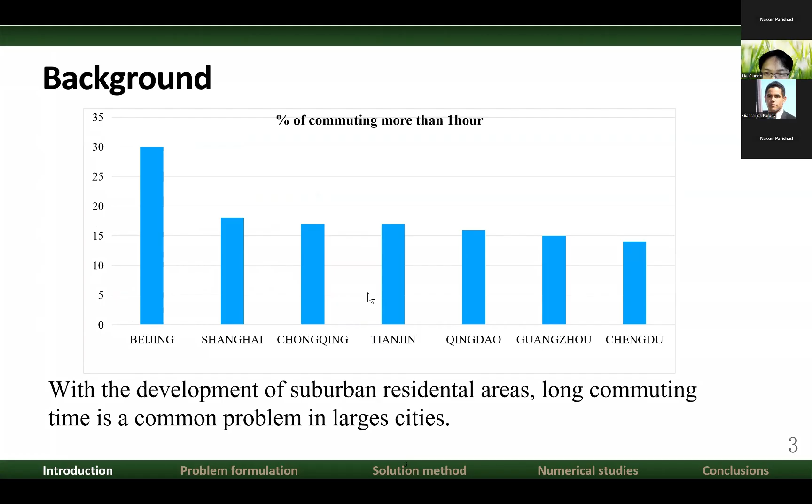Express bus service, or limited stop bus service, is a potential solution to the problem. As express buses skip a series of bus stops and may use a faster path, travel time can be significantly reduced. Moreover, due to shorter circulation time, the express bus can provide higher frequency with a limited fleet size. So with proper design, express service can bring a lot of benefits.

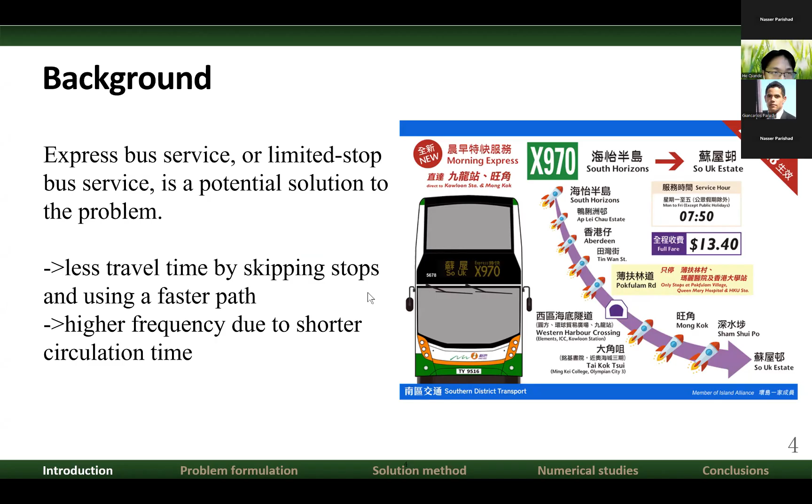We reviewed the literature related to express bus service design, and you can see the scale of their research is usually small, such as a single road or bus corridor. Only one paper expands the model to a network scale. Moreover, all of these studies only consider predefined regular routes. Currently, there is no literature considering regular route design and express service design at the same stage. Besides, we also consider deadheading as a strategy to avoid overload.

The main contributions of this study are as follows. First, we propose a model to simultaneously consider transit route design, express service design, and frequency setting problems, while considering capacity and the deadhead strategy. Second, we developed a modified genetic algorithm to solve the model. Third, we examined the properties of the problem and the performance of the GA algorithm.

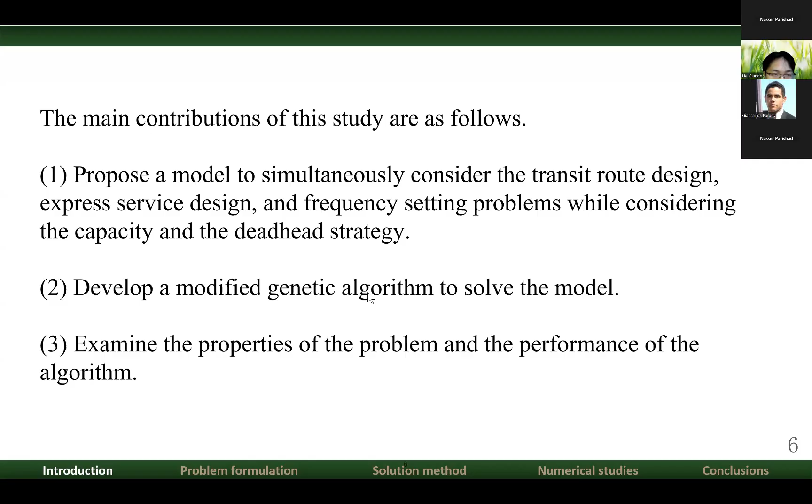The second part is the problem formulation. To begin with, let me introduce the definition of regular routes and express routes in this study. Regular routes have to serve every passing bus stop; no stop skipping is allowed. The road network contains several express links, such as highways or elevated roads, and regular routes are not allowed to use them. One regular route has at most one corresponding express route.

Every stop served by an express route is also served by the corresponding regular route, and of course, express routes are allowed to use the express links in the network.

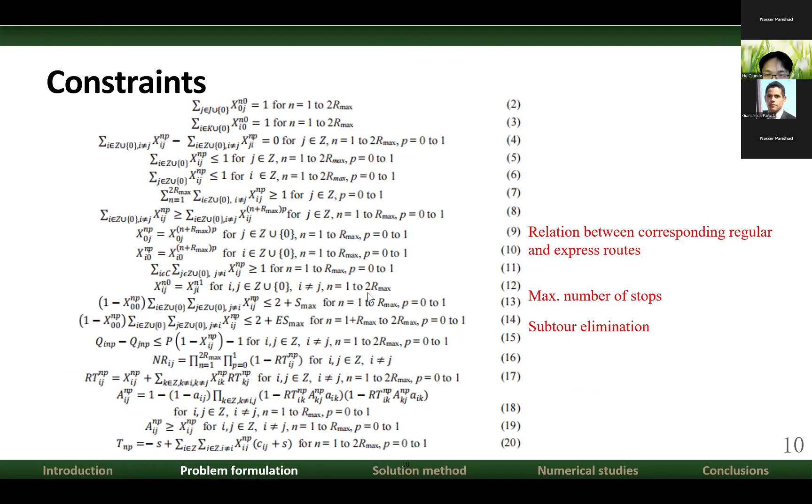The objective of this study is to minimize the social cost, which is the weighted sum of passenger travel time, the number of transfers, and the cost of the bus operator. This is subject to many constraints, including the relationship between corresponding regular and express routes, maximum number of stops, subtour elimination, maximum route trip time, minimum frequency, limited fleet size, and no overload.

Now let me move on to the solution method. We aim to solve the bus route design, express service design, and frequency setting at the same stage. This is very complex, as a general transit network design problem without considering frequency is already NP-hard. Thus, our integrated problem is also NP-hard, and a heuristic or meta-heuristic is required.

In this study, we propose a modified genetic algorithm to solve the problem. Due to time limitations, I can only show the general scheme of the modified GA. The GA is used to determine the regular route design and express service design, and a capacitated frequency-setting algorithm is used to solve the optimal frequency setting for each GA solution.

We first initialize several GA solutions and set the frequency for them. Then we generate offspring through crossover and mutation operators. After that, a stop sequence improvement heuristic and a repair operator are used to improve the quality of the offspring and ensure all constraints are satisfied.

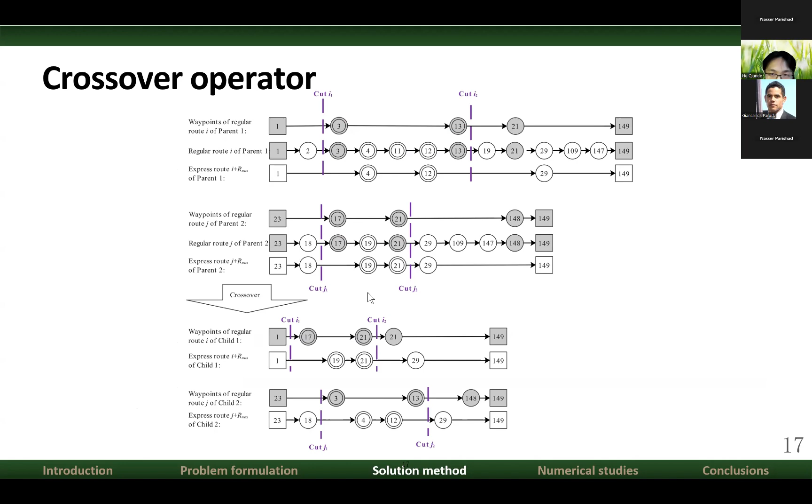We exchange the local route and the corresponding express route between two parents and form the offspring solution. This is another crossover operator, which is to exchange the sequence of the stops between two solutions. And then we have totally six mutation operators, which change the genes for the local route and the express route respectively.

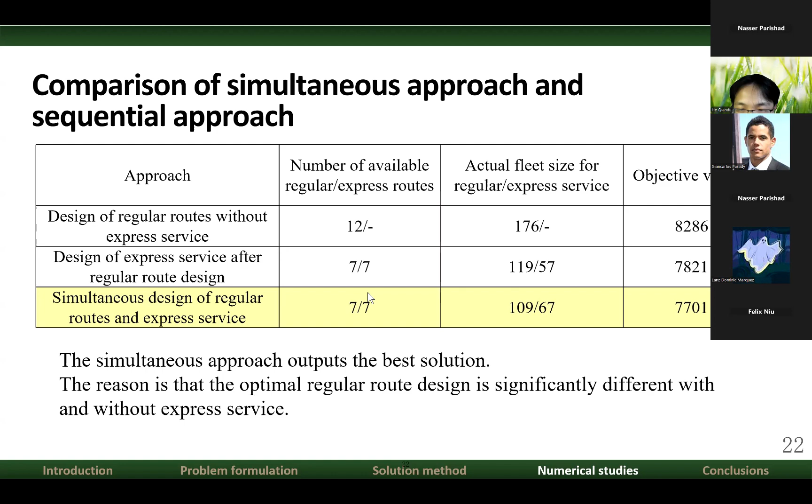In addition, we notice that there is a difference between the optimal number of regular routes with and without the express service. The benefit of adding express service based on an optimized 12-route regular bus network would be minimal. Thus, we suggest that when adding express service on an existing regular transit system, the regular routes should also be redesigned at the same stage.

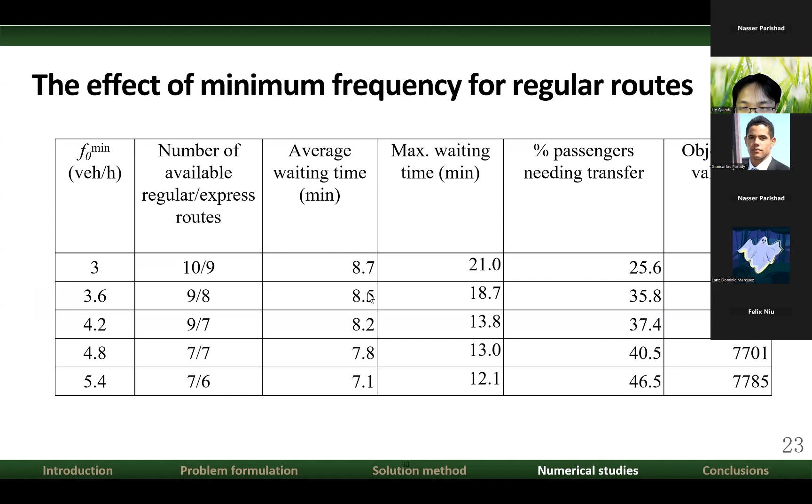We also test the effect of some parameters, and we can see when the minimum frequency increases, the number of available routes and average waiting time drops, while the number of passengers needing transfer, and the main objective value increases. Thus, the frequency constraint should be carefully determined based on the trade-off between the waiting time and transfer.

In conclusion: first, we propose a model to formulate the transit route design, express service design, and frequency setting problem with capacity constraints and the deadhead strategy. A modified genetic algorithm was developed to solve the model, with several specific operators designed for the investigated problem.

The numerical experiments show that introducing express service can significantly reduce the total social cost. In addition, the simultaneous approach to design regular routes and express service can output a better solution than optimizing express service based on predefined regular routes.

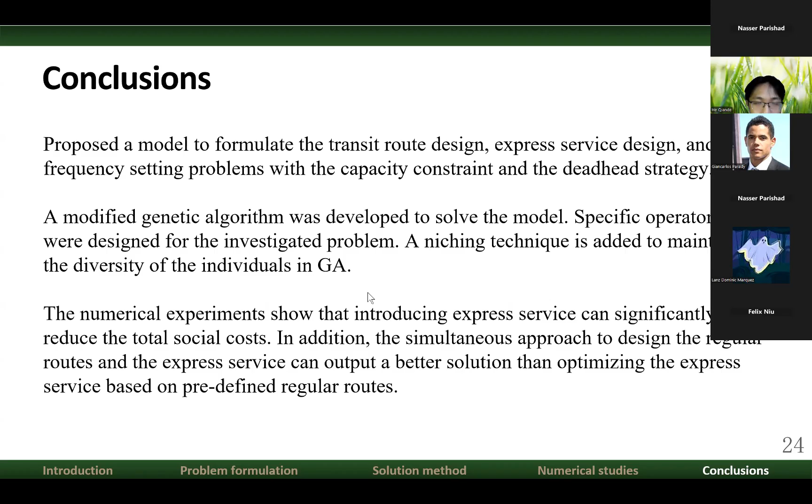There's a question in the chat: does the model account for the possible different operating schedules of regular and express buses? For example, in Singapore, express buses operate only during peak hours on specific days. Will this affect the route design?

The express service should be applied only when the passenger flow is large enough. So in this study we just use the data in the peak hours. Of course, whether to apply the express service during the normal time should be re-evaluated whenever considered.

Okay, thank you. If there are any other questions, please write them in the chat. I have a clarification: you talk about the deadhead strategy, but I didn't catch the meaning of that. Can you explain in a bit more detail about that consideration of the deadhead strategy?

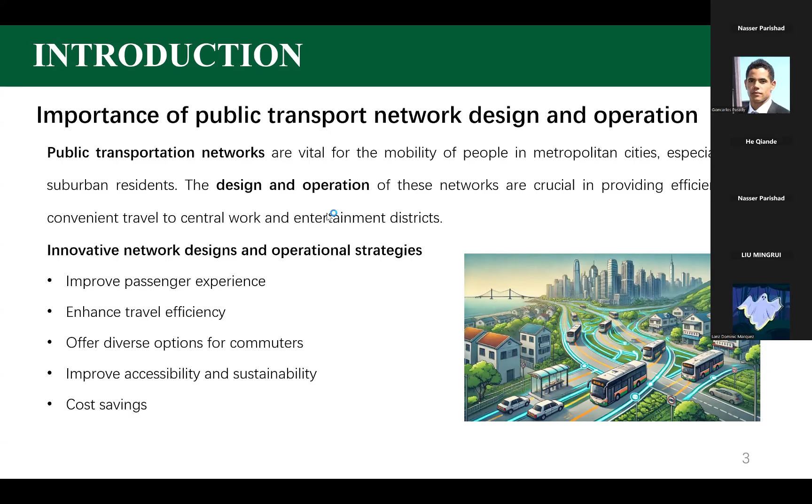These approaches also contribute to sustainability while achieving significant cost savings by streamlining operations. To improve transportation service quality, innovative public network design and operations are being introduced. One effective method to enhance the level of service is through the implementation of limited stop lines. These lines make fewer stops than normal lines, striking a balance between faster travel times and serving key intermediate stops. Additionally, express lines can be established to provide fast and direct service between two points, catering to areas with high demand for quicker travel times. By combining these line patterns, public transportation systems can offer a diverse range of options and enhance the overall passenger experience.

Previous literature solved the limited stop service design problem in explicit or non-explicit ways. For example, some designed limited stop service in a non-explicit way, constructing limited stop lines by selecting from predetermined candidate limited stop lines. However, this design is not explicit, since this kind of candidate line selection is not able to obtain the real best pattern. Some researchers started to solve this design explicitly, which corresponds to making the decision for every intermediate stop about whether to skip it or not, for all limited stop lines.

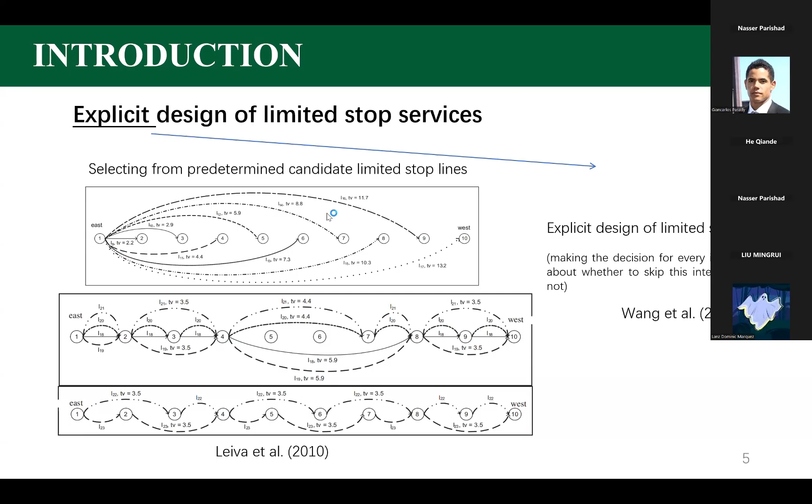Bus networks with different numbers of limited stop lines corresponding to each normal line are designed by researchers. Leiva et al. and Wang et al. consider unlimited numbers of limited stop lines corresponding to each normal line in their network, while Leiva discussed that there are minimal benefits of constructing more than two limited stop services along one normal line. Therefore, one way to improve network design can become that each normal line is accompanied by one corresponding limited stop line. However, introducing more lines causes more buses to run, which increases operators' cost.

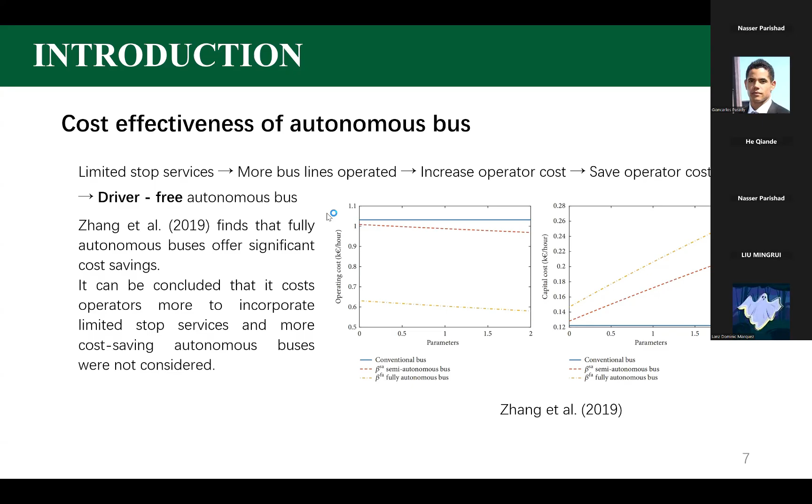To handle this problem and the limitation of operators' budgets, autonomous buses are considered to save operators' costs since autonomous buses are driver-free. Some studies in the literature discuss the beneficial aspects of autonomous buses. Zhang et al. finds that fully autonomous buses offer significant cost savings. It can be concluded that it costs operators more to incorporate limited stop services, and more cost-saving autonomous buses were not considered in previous research.

While we also can notice that even if incorporating autonomous vehicles can bring benefits to the public transportation system, passengers are concerned about the safety issues. To our knowledge, the integration of both limited stop and autonomous services has not been researched. Consequently, considering both limited stop services and autonomous bus services makes use of the respective advantage of each service and brings benefits for both operators and the passengers.

And there are three main objectives of this work. The first is that this is the first research considering both limited stop and autonomous bus services. Second, we develop a mathematical formulation and design a specific GA to solve this problem. Third, we implement experiments to show the effectiveness of this kind of integration and conduct sensitivity analysis to demonstrate suitable scenarios and provide policy insights.

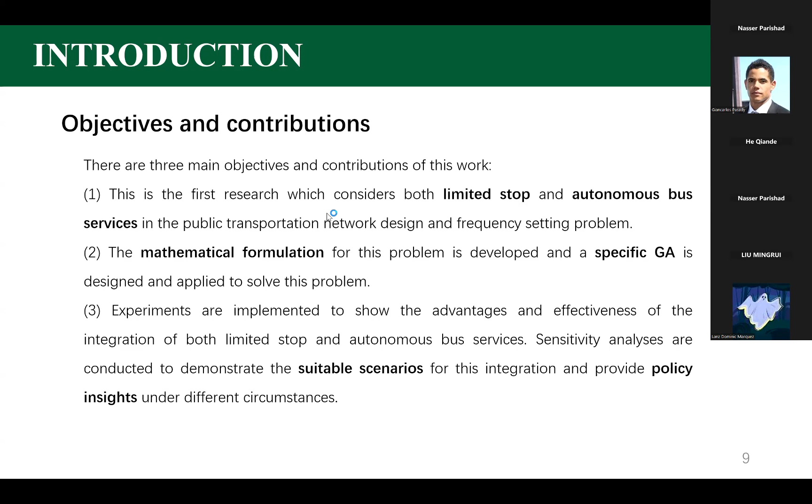And then let's move on to the formulation part. The objective function is to minimize the weighted sum of first, total passenger travel time, second, number of transfers, and third, the total operator's cost.

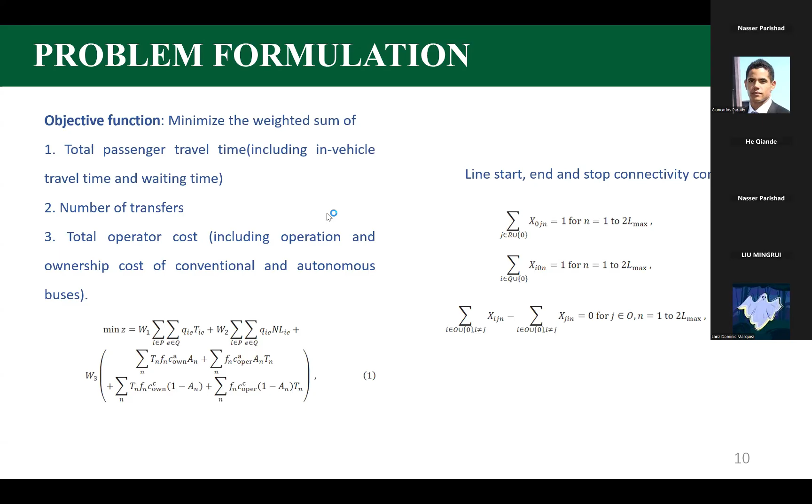The first three constraints are line start, end, and stop connectivity constraints. Constraints 5 and 6 guarantee one stop can be visited by one normal line once at most. Constraint 7 calculates the line travel time. Constraints 8 and 9 are the conventional and the autonomous bus fleet size constraints. 10 and 11 set requirements for minimal and maximum frequency.

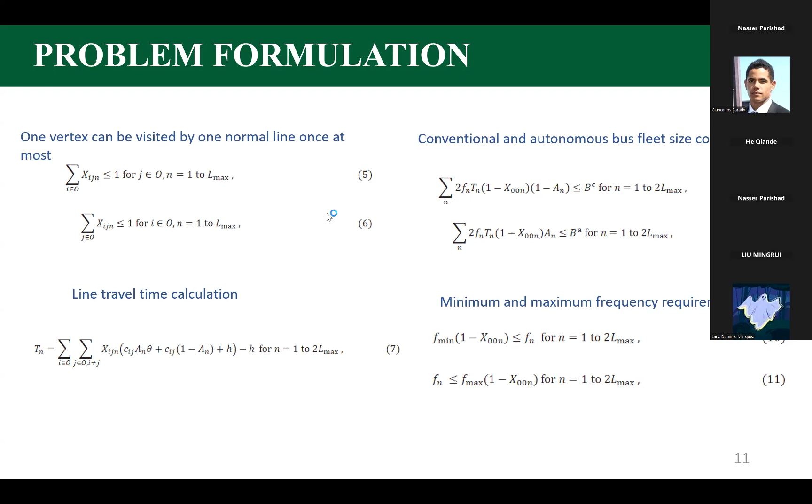Constraint 12 limits the maximum number of intermediate stops for normal bus lines. Constraint 13 guarantees that limited stop bus lines must skip at least one bus stop, and constraint 14 is the vertex covering constraint. Constraint 15 defines the indicator of whether line N visits both I and J. Constraint 16 calculates travel time from I to J.

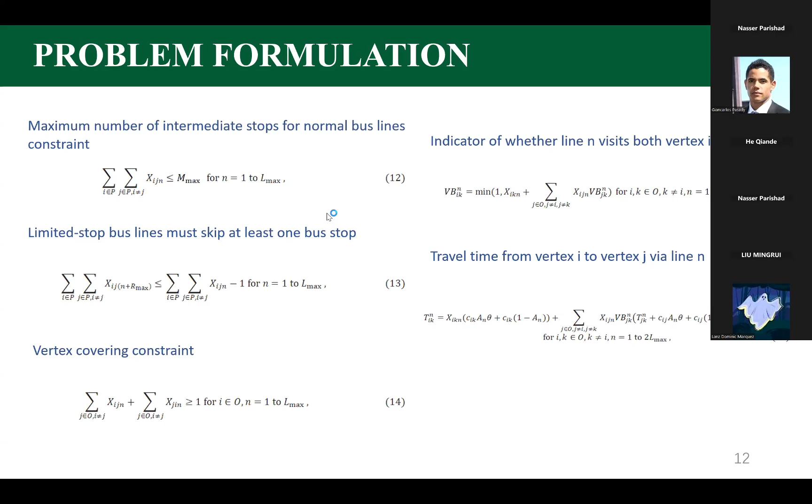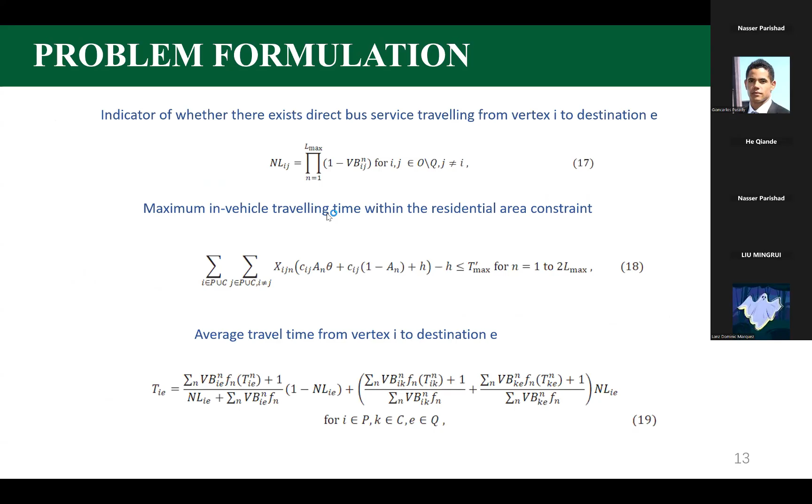Constraint 17 is also an indicator, and constraint 18 limits the maximum in-vehicle traveling time, and constraint 19 calculates the average travel time from I to E. And constraints 20 and 21 define the relationship of cost structure between autonomous and the conventional buses.

Constraints 22 and 23 are the limited stop bus lines start and end at the same stops as the corresponding normal bus lines. And the last constraint guarantees that limited stop bus lines must visit the subset of the stops of corresponding normal bus lines.

The first is that we develop a vehicle assignment heuristic based on line search to solve the frequency setting problem. The second is that a line pattern heuristic is integrated to solve the line pattern design problem. And the third is that we develop an autonomous line selection heuristic and autonomous bus lines selection mutation operators to solve the autonomous bus lines determination problem.

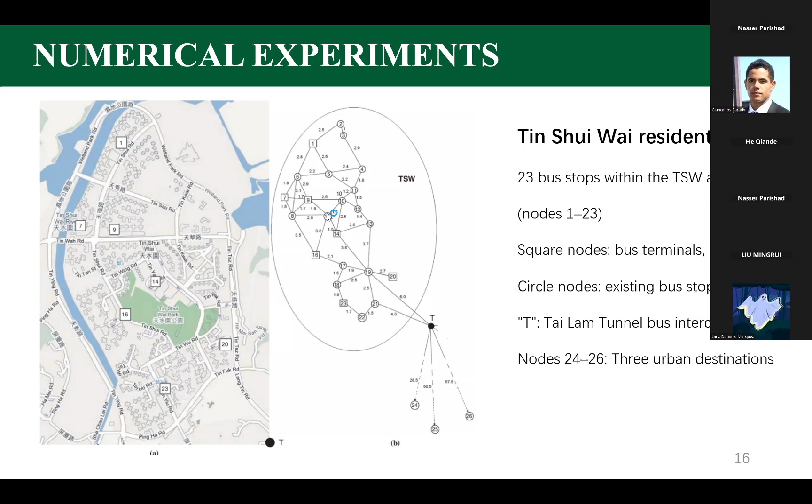However, due to the planning of more lines, more conventional buses need to be operated on the network, resulting in larger operator cost compared to the base case. When autonomous buses are also considered in scenario 3, total passenger travel time increases because of the slower speed of autonomous buses. However, autonomous buses are cheaper than conventional buses, so the operator cost gets lower.

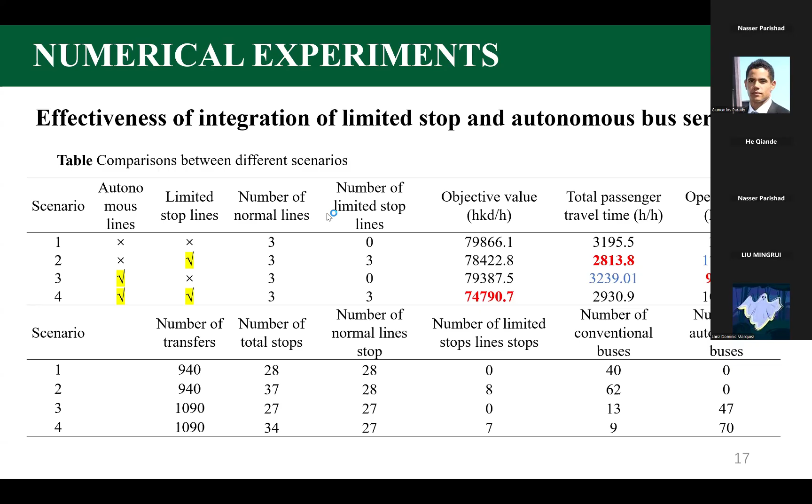In scenario 4, both advantages of limited stop lines and autonomous buses are integrated, so the objective value is the smallest. Compared to the base case, both total passenger travel time and operator cost get lower. Therefore, integrating both limited stop and autonomous bus services into the public transportation network is beneficial for both passengers and operators. Since the nature of the optimization problem is multi-objective, the value of travel time is significant for the trade-off.

This is because when VTT becomes smaller, from 120 to 40 Hong Kong dollars per hour, passenger travel time becomes less significant to the objective value, so some conventional buses are replaced by the more cost-saving autonomous buses. When VTT becomes even lower, from 40 to 20 Hong Kong dollars per hour, no more conventional buses can be replaced, so the number of autonomous buses gets lower in order to save operator cost.

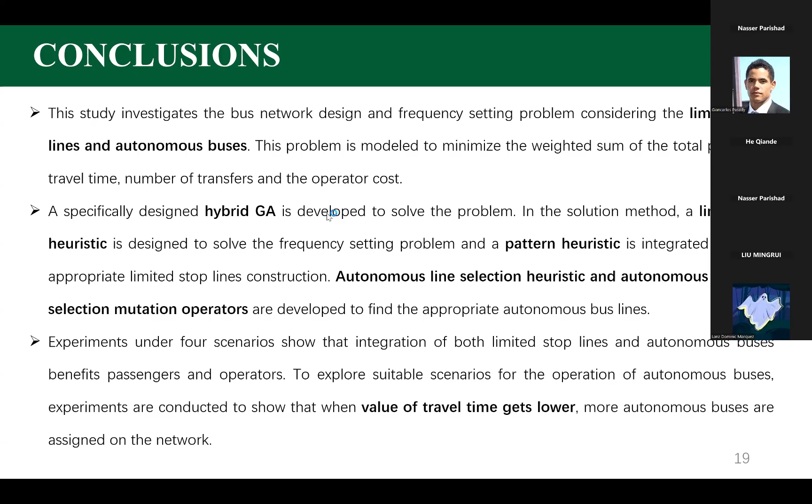Thank you very much. I don't see any questions in the chat yet, but if there are any, please post them. I want to ask you about the cost structure between autonomous buses and regular buses. You mentioned that they are cheaper.

Can you elaborate on that? I would assume that, at least I don't know what the human resource cost is in Hong Kong, but I would assume that the LiDAR technology or the vehicle itself is very expensive. So can you elaborate on your assumptions for the cost structures?

Yes, the total cost of one autonomous bus is cheaper than a conventional bus. Actually, the ownership cost of autonomous buses is larger than the conventional bus, but the operating cost of autonomous buses is cheaper than conventional buses because it's driver-free. We identified that together, and the result is that the total operating cost of one autonomous bus is cheaper than one conventional bus.

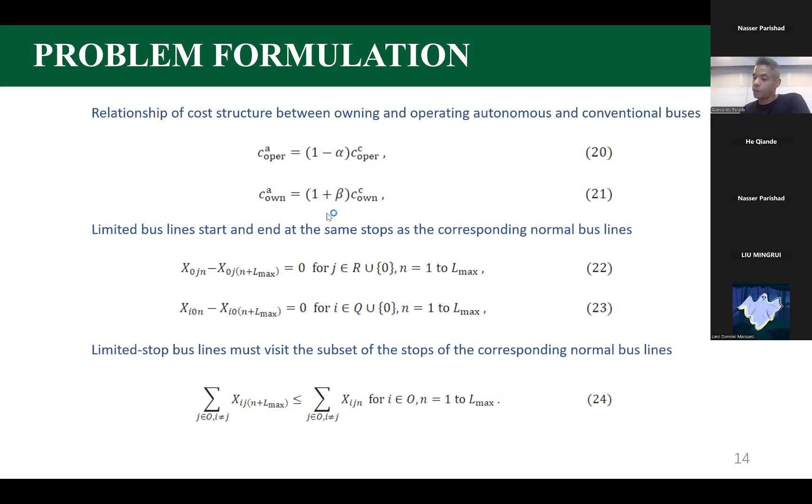Okay, no questions on the chat yet. So the other thing is, the key difference in the whole model will essentially be the cost structure, right? What differentiates an autonomous bus from a regular bus is essentially that. There are no operational differences in terms of the autonomous bus, right?

Other than cost, there is one more difference: autonomous buses run slower than conventional buses.

Do you have data on that as well? Actually, yeah, now that you mentioned it, they're not that fast. So how much slower are they?

We use three different values, like 1.1, 1.2, and 1.3, as the ratio of the speeds. Are these values also assumed, or are they based on empirical observations? These are assumed, yeah.

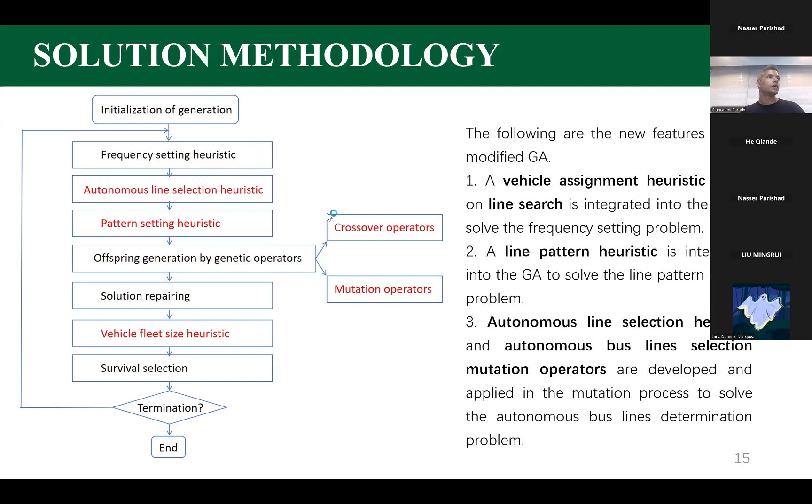Hi, Professor. If possible, can you please turn your video on? Professor, can you see my slides? Yes. Can you put them in full screen? Okay.

Great. Hi, everyone. My name is Yang Haosen, and I currently work as a research assistant under the supervision of Professor Lin Chuanyang at the School of Architecture, Southwest University. Today, I'm honored to share with you a recent study conducted by our team.

In recent years, the global trend of population aging has intensified due to increasing life expectancy and low birth rates. According to the United Nations, the number of older adults worldwide is expected to reach 1.3 billion by 2050. Japan currently has the highest aging rate in the world, with adults aged 65 and above accounting for 29.3% of the national population as of 2024, driven by four major trends: aging population, disability, empty nest families, and low birth rates.

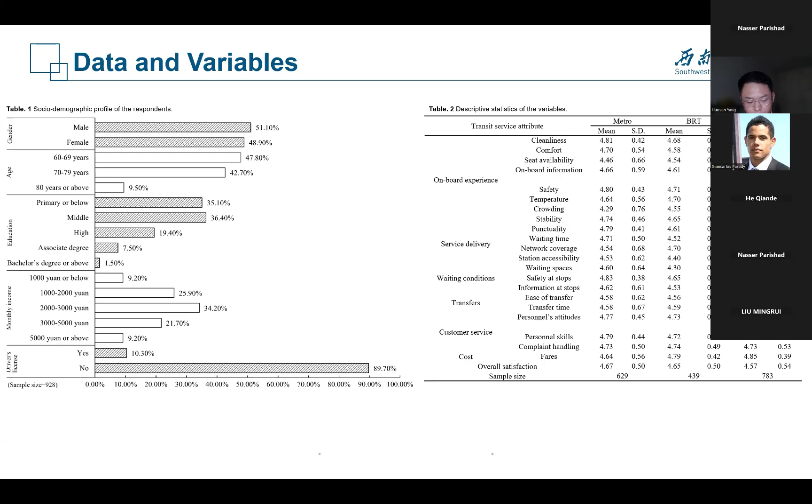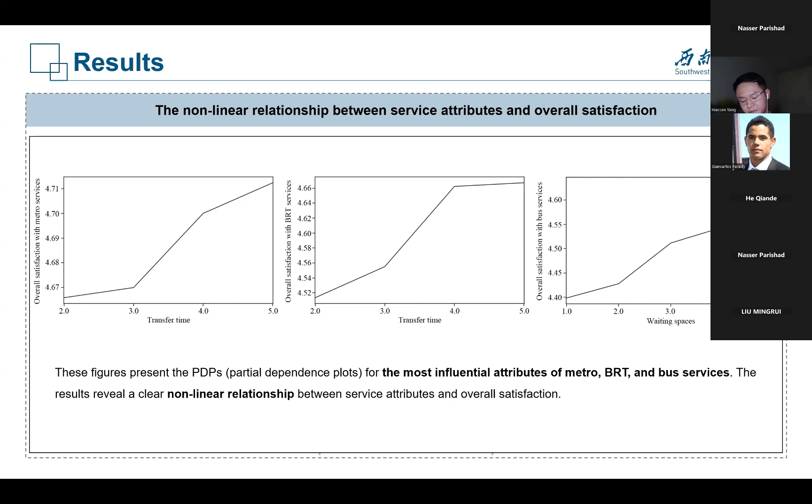This study makes 2 main contributions. First, it introduces machine learning methods into public transit satisfaction research with a focus on older adults as a special group. Second, it provides a scientific basis for promoting age-friendly development across multiple public transit modes.

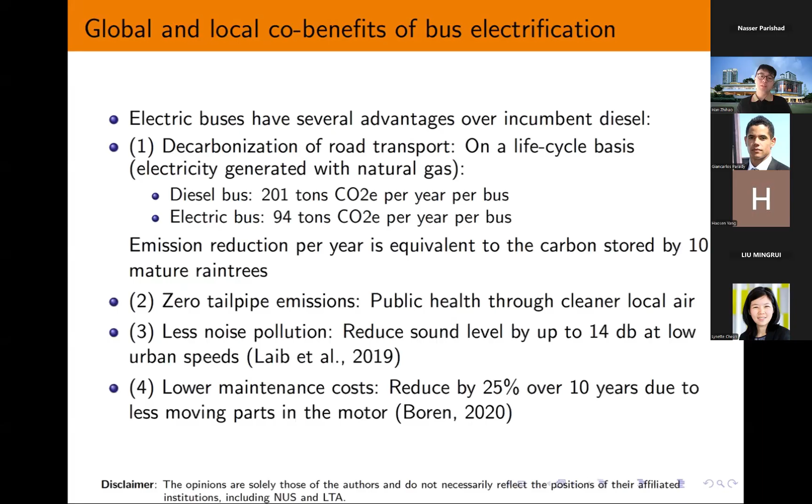Secondly, electric buses have zero tailpipe emissions, bringing huge public health benefits through cleaner local air. There are two other advantages: less noise pollution and lower maintenance costs with electric buses.

In this paper, we want to answer two questions. First, while the Singapore government invests heavily in electric buses, are commuters and citizens aware of the benefits, and are they willing to pay for electric buses? Secondly, we want to know if an educational campaign on clean bus technology can shape individual preferences, raising willingness to pay and leading to increased actual usage of electric buses. To answer these questions, we implemented a large-scale randomized control trial in Singapore.

So this is a 4-month educational campaign with 1,200 Singapore households, and we repeatedly highlight the co-benefits of investing in clean bus technology while tracking their public transport use.

There are 3 main findings of our paper. First, the intervention improved household awareness of bus engine types and the perceived advantages of electric buses. Secondly, our hypothetical choice experiments indicate that the treatment raised the willingness to pay by 10 US cents per bus trip. Finally, the shift in preferences is also observed in real behavior using the transit payment data. So the main takeaway of our paper is education can expand the support for general environmental protection.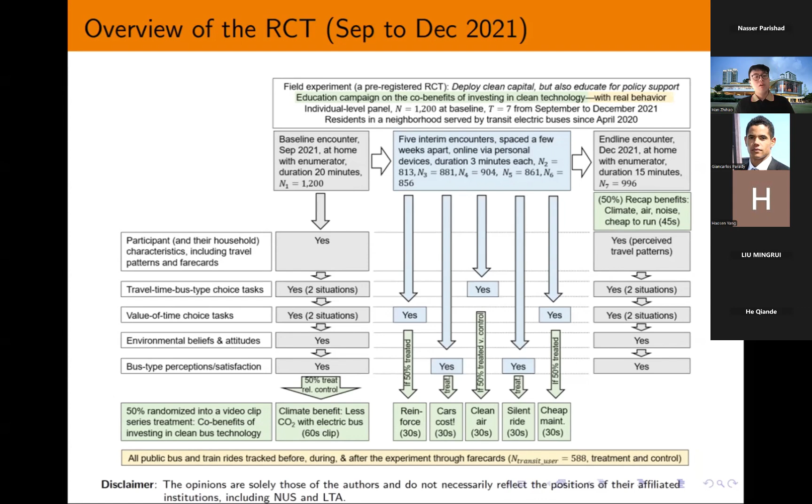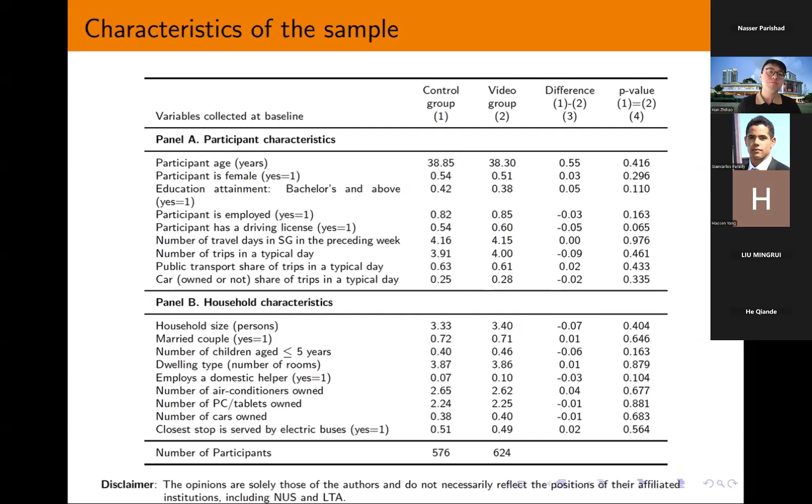As I mentioned earlier, we let participants do several choice experiments. The first choice experiment is about a travel time and bus engine type choice task. There are 2 hypothetical but realistic alternatives, bus A and B, differing on 3 attributes: the walking time to the bus stop, the engine type, and the riding time sitting on the bus.

As you may notice, in the first choice task we don't have the bus fare attribute. So we designed a second choice task, a very classical value-of-time choice experiment, to calculate the willingness to pay in monetary units. Here we have 2 alternatives, regular or express bus, differing on riding time and bus fare. We chose the attribute levels to match the distribution of cost per minute of time savings using estimates from the transit agency.

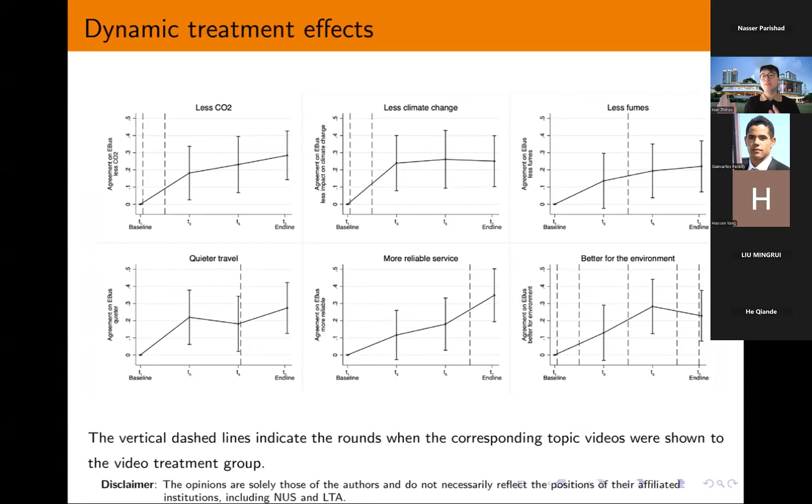This figure shows the dynamic treatment effects. You can see the treatment effect shows up immediately after the baseline interview, and the effect is persistent until the endline encounter.

Then we use the 2-choice experiment to infer the willingness to pay for electric buses. We build 2 discrete choice models. The first model uses the travel time bus type choice task. There are 2 alternatives and 6 choice situations, and 68% of participants completed all 6 choice tasks. We have 3 attributes, and the coefficient on each attribute is random.

We allow the coefficient to be normally distributed and IID across participants. We also allow the preference on walking time and riding time to be correlated. Importantly, the video treatment shifts the preference on each attribute. So the willingness to pay in minutes of ride time can be calculated as a ratio of 2 betas, beta 1 and beta 3.

Then to calculate the willingness to pay in monetary units, we use the second choice task. There are 2 alternatives, but now 8 choice situations, with 2 attributes: bus fare and riding time. We restrict the coefficient on bus fare to be negative by modeling the distribution of log alpha 1 and alpha 2. Using this framework, we can calculate the value of time by the ratio of alpha 2 and alpha 1. So the willingness to pay in monetary units is just the product of the 2 betas and 2 alphas.

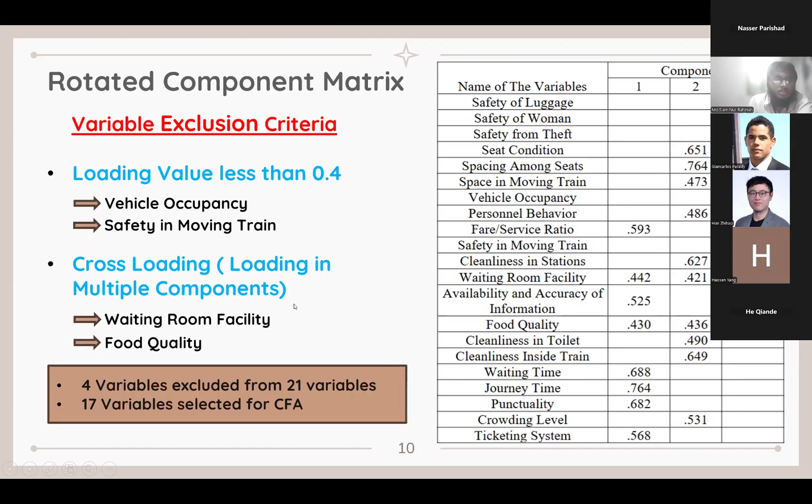So basically, as we had 21 variables, we excluded 4 variables for these two reasons. So finally we have 17 variables to work with for our confirmatory factor analysis.

This is the name we have given to our latent variables. Our first latent variable is convenience and cleanliness, which has 8 observed variables connected to it. It started with space in moving trains, spacing among seats, seat condition, crowding level, cleanliness in toilet or station, in train, or a kind of personnel behavior.

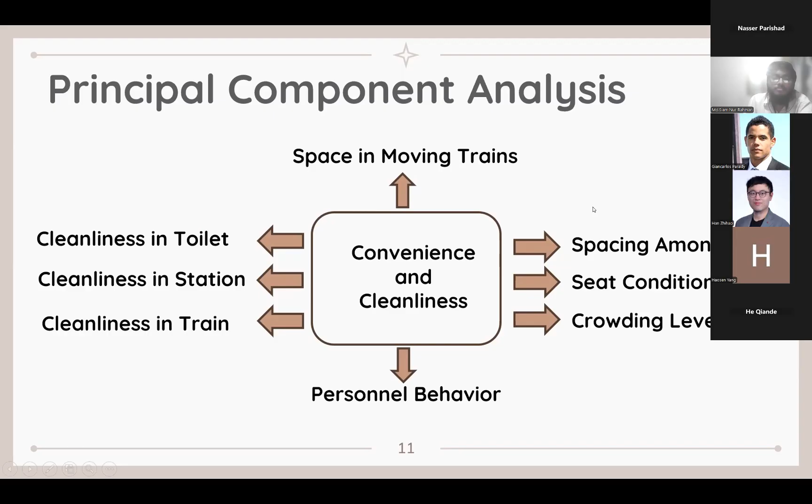Following that, we have another latent variable named operating efficiency, which is constructed by the observed variables fare service ratio, punctuality, ticketing system, waiting time, journey time, and availability and accuracy of information.

And our last latent variable we chose is safety and security, which has observed variables safety of luggage, safety from theft, and safety of women.

Finally, we had the question of understanding our overall service quality and the effect or impact of these observed variables on overall service quality, by means of latent variables, to make it more understandable and easier. We also constructed lines to understand their covariance and the dependency of latent variables among each other.

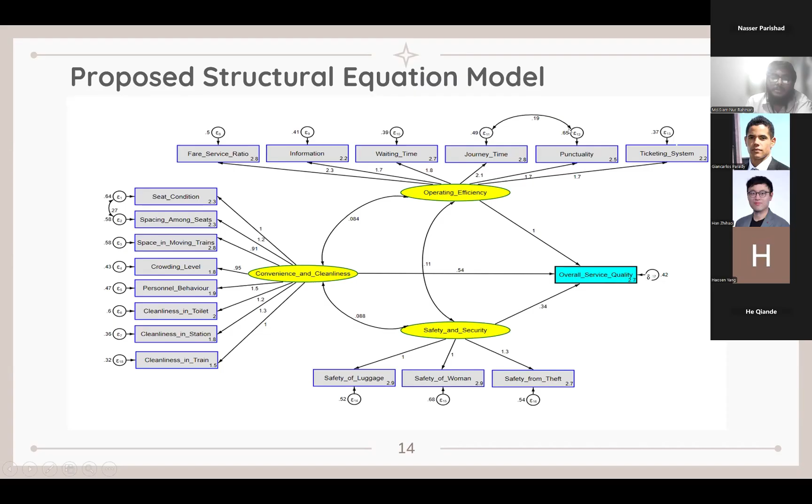Operating efficiency has the highest impact on overall service quality, and among operating efficiency, fare service ratio has the highest impact on operating efficiency, followed by convenience and cleanliness, which has a major impact on overall service quality, more than safety and security.

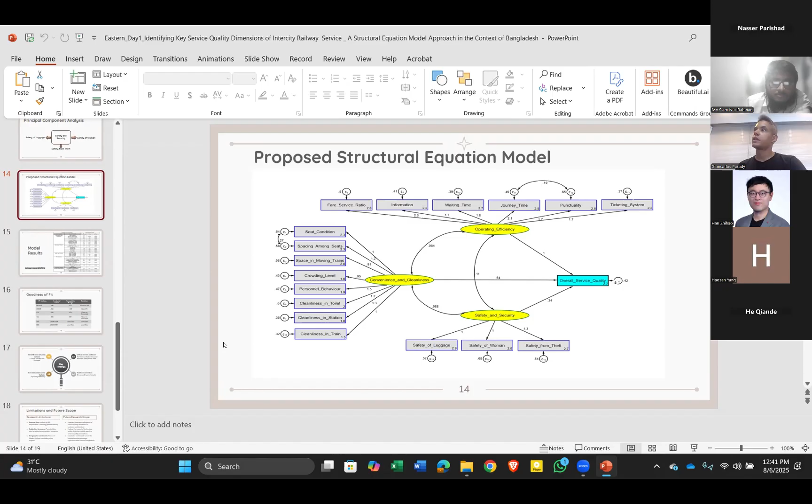Okay, this one. Yeah, that one, right?

So you say close to the threshold, but I don't think 0.80 and 0.83 are close to the thresholds. Ideally, you want to be 0.95 and up. The more relaxed threshold says like 0.90, but it shouldn't go below that. Going to 0.8 is a little bit of a stretch.

That's basically what I have seen in most SEM models, as I was doing literature review. It is very rare that as the data set goes large, they reach 0.95. It stays around 0.9 or 0.85. That's why I said it.

I would guess that would be difficult to get past peer review, but okay. I agree with the argument. Are there any other questions?

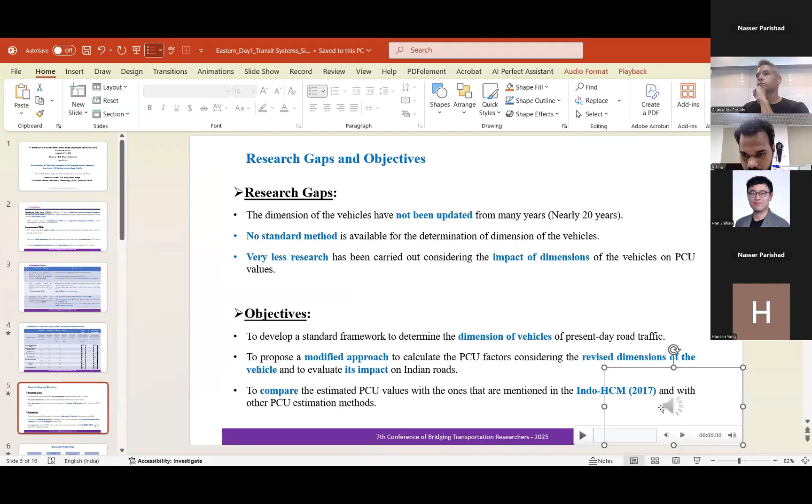Yes sir, I'm very sorry for the disturbance. Actually that presentation had the video, so I was not able to speak. So I will start the presentation now. Sir, I hope I'm audible and the presentation is clearly visible, is it so sir? Yes, all good. Go ahead, yes, I will go ahead.

So I welcome you all for this presentation, and a very good day to one and all present in this conference. My presentation is on development of modified approaches for the implementable passenger car units for the Indian road traffic. My name is Sukhjinder Singh, and I am a research scholar in the Department of Civil Engineering at Indian Institute of Technology, BHU Varanasi, from India.

So basically, as we are very much aware, passenger car units are the equivalent factors which convert heterogeneous traffic into homogeneous traffic, so that we can represent the flow and density in a common unit. This is done so that the equivalence can be carried out on the road section.

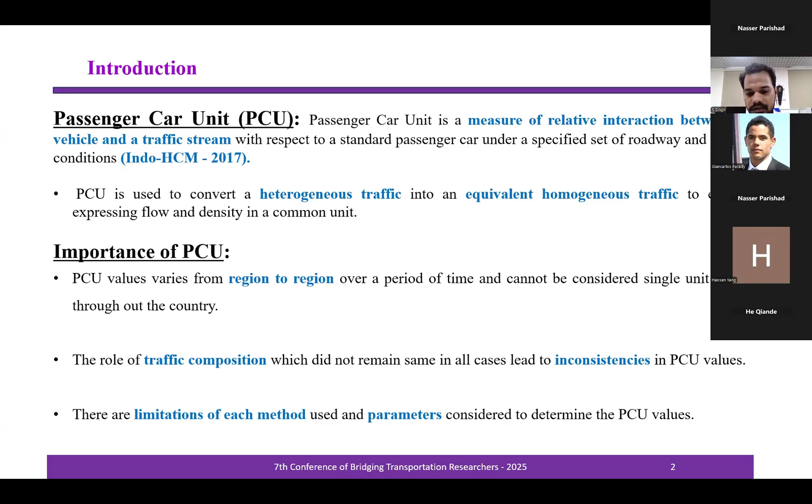Even though there are many methodologies suggested by research articles, each of the methods comes with its own limitations based on the parameters considered. Here I have listed a few of the literature works which have been studied to carry out this research. Usually the speed area ratio method, called Chandra's method, is adopted in most studies to determine the PCU values.

But still, some recent researchers have taken this speed area ratio method and made modifications to the formula. They suggested that instead of going with the projected area, we can use the effective area, which is based on the size ratio of the vehicle.

Another study suggested that instead of considering the projected area of the vehicle, we can go with the length of the vehicle, and the width of the vehicle as 1.1 times the actual width, so that the neighboring influence can also be considered.

One of the studies directly used the georeferencing method with ArcGIS software to determine the area and dimension of the vehicle from bird's eye view drone-captured photographic frames, and then determine the PCU values. This methodology was much appreciated as it eliminates the speed of vehicle, headway calculation, and flow rate methods, which are very extensive to extract from video data.

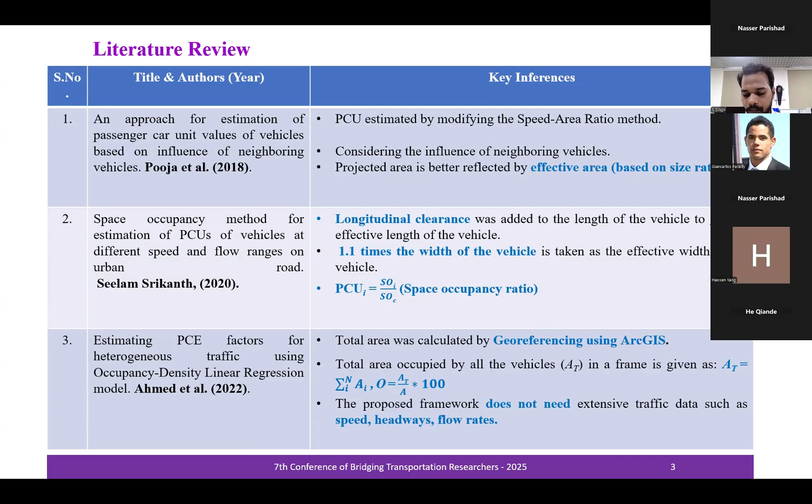Further, many other research articles were referred, and it has been inferred that the values mentioned in the Indo-HCM are almost similar to those published in an article in the year 2003. So there has been a significant time period of two decades where the revision of these articles has not been done.

To overcome this problem, a recent framework was suggested in which online data from various vehicle manufacturing websites and sales platforms were taken, and the dimensions of the vehicles were determined.

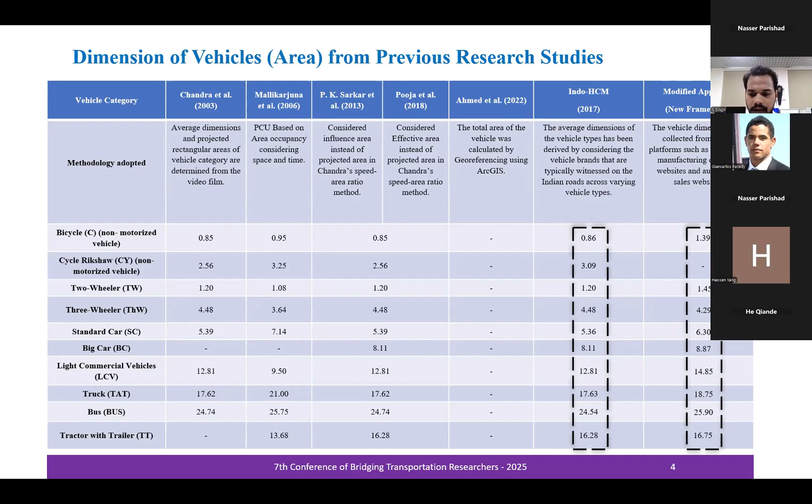Based on previous research studies, the research gap has been defined: the dimension of the vehicle has not been updated for almost 20 years, and no standard method is available for determining the dimension of the vehicle. Also, very little research has been carried out considering the impact of present day vehicles that ply on road sections.

Based on the research gaps, the objectives have been defined. The first objective is to develop a standard framework so that the dimension of the vehicle can be determined for present day road traffic. The second objective is to suggest a modified approach to determine the PCU values considering this revised dimension and to evaluate its impact on Indian roads.

The third objective is to compare these estimated values with those mentioned in the Indo-HCM and with other PCU methods, so that the variation between the PCU values can be observed.

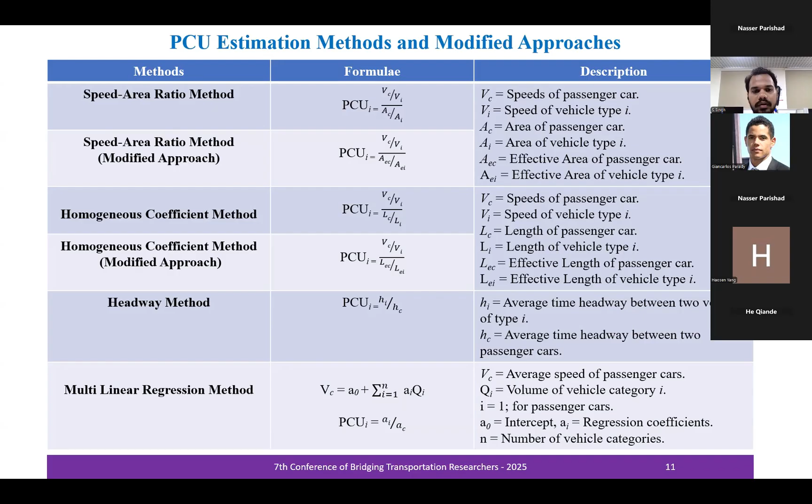So here in the highlighted region, we can observe that the PCU values mentioned in the Indo HCM, and the ones determined using the speed area ratio method, and the ones determined using the modified approach, the values are smaller for the small size vehicles like small car, big car, two-wheeler, and light commercial vehicle, whereas for the large size vehicle the PCU values are increasing.

Also, a significant variation was observed in the homogeneous coefficient method, where instead of the area, the length of the vehicles was considered, and the values were very much fluctuating. The reason for this is the consideration of only the length of the vehicle, which does not define the complete interaction between the vehicles. So it is suggested to go with the area of the vehicle instead of the length of the vehicle.

Also, in the headway method and multilinear regression analysis, the dimensions were very much varying when compared to the ones determined using the modified approaches.

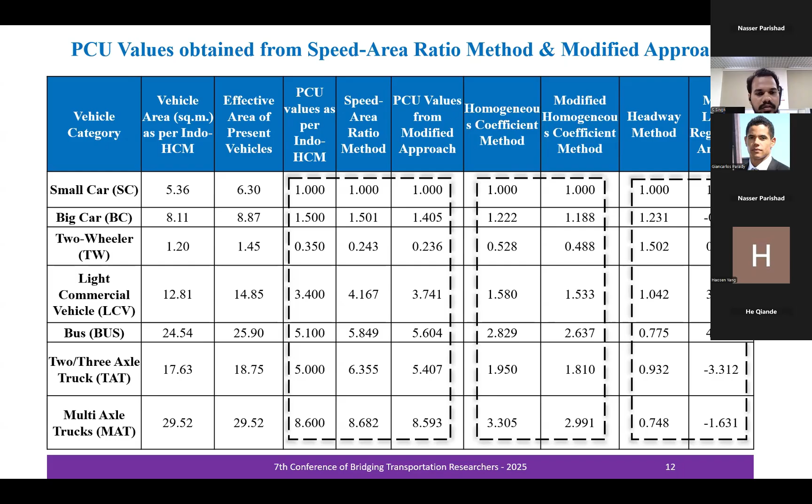Further, the capacity calculation was also carried out, and it has been observed that there has been a 10% decrease in the capacity values when this calculation was carried out using the modified approach as compared to the speed area ratio method.

The reason for this is the smaller PCU values for the small size vehicles, and these small size vehicles contribute 80 to 85% of the composition of vehicles. When compared with the large size vehicles, since these are lesser in composition, and their PCU values are larger, but still they were not able to contribute to the larger section or composition of the vehicles, which leads to the decrease in the capacity values.

Further, from the current study, it has been inferred that with the increase in the dimension of the vehicle, the PCU values are decreasing. That is, for the small size vehicle, and for the large size vehicle, the values are increasing.

This necessitates the standardization and updation of the PCU values, also the dimensions of the vehicle used to determine the PCU values. Further, it has also been observed that the dimensions have a significant impact on the PCU values, due to which the values fluctuate over the period of time, as the data collection was carried out in some other locations as well, at different time periods, and the fluctuation was observed.

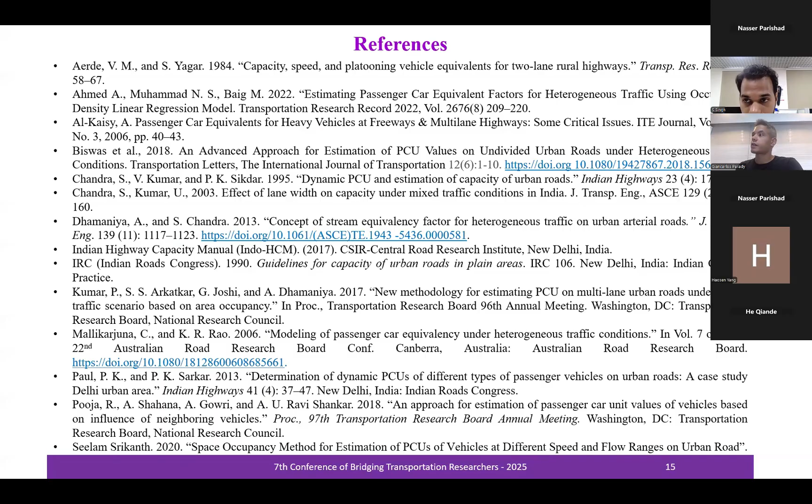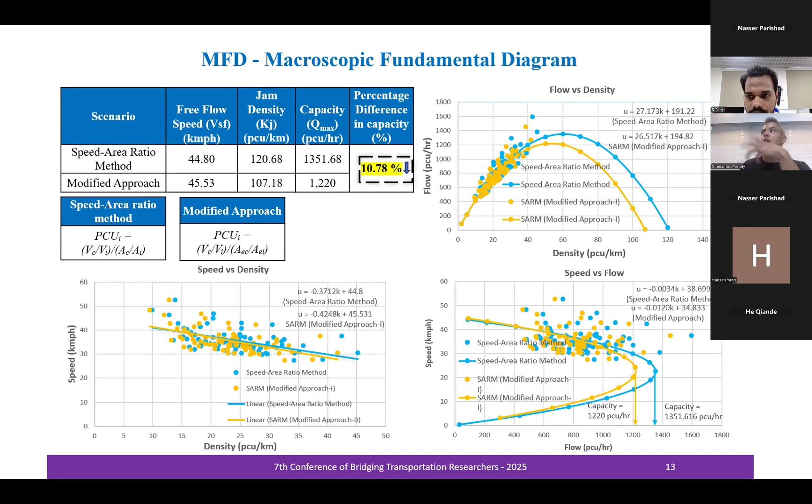Okay, but I think showing the percentage difference in capacity, like a reduction of 11%, that's a very interesting finding. So compared to the Indo-HCM, the Indo Highway Capacity Manual, how do they calculate it? I may have missed the explanation.

But these dimensions were defined in the 2017-18 time period, and were almost equivalent to those mentioned in a research article published in 2003. So there was not much significant variation between these two, even though there was a time period of some 15 years. At present, when we carried out this research study and determined the dimensions of the vehicles for present day road traffic, we observed a significant variation. So we are suggesting that we should go with a revision of the dimension of the vehicle.

Okay, thank you, sir. Oh, there's a question from Nasser here. Considering a few points, yeah, that was exactly my question, my first question. Yeah, you said that, yes, that was my question as well. Yes, it's answered. We need more data, right? That was the answer. Yeah.